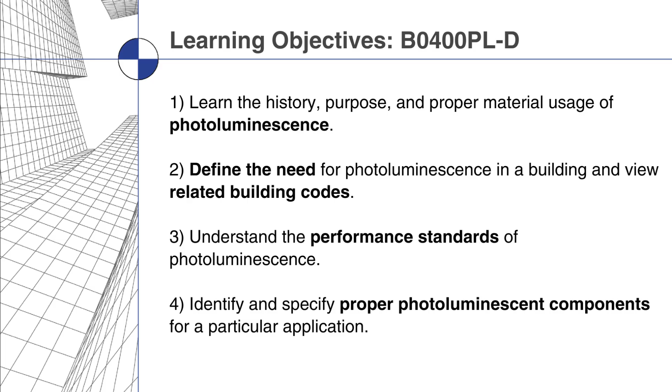By the end of this course, you'll understand the history and purpose of photoluminescence, its importance in building safety, and how it aligns with key building codes. You'll also learn performance standards and how to choose the right photoluminescent materials for specific applications.

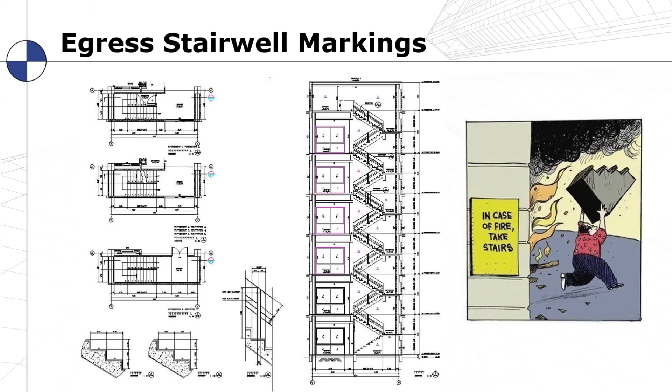Today we're going to talk about the fundamentals of photoluminescent egress markings. These are typically done in high-rise buildings. A high-rise building is anything with access 75 feet and higher with occupied space. This is a typical drawing schematic of the plan views of a stair so that you can see where the landings are and where the steps are, and then an elevation view as well so that you can see the height of the structure and the path going out.

So there's different types of luminescence. We're going to be talking about this whole glow-in-the-dark kind of process that has been introduced into the building environment to allow people to escape through egress stairwells during some kind of emergency.

There's different types of luminescence, so we'll start there. Self-luminescence, which is a radioactive item. Anything that has its own source that would be mineral-based would be some type of radioactive, and those have been introduced into building signs, but they're mostly being phased out now. They were called tritium signs. That's the exit signs that they put above the doors. That's not really part of this process.

Chemiluminescent, which is like the glow sticks you see at the fair or something like that. There's a two-part or multiple-part mixture. When you crack the little vials open inside by twisting it and shake it, they glow. Or there's bioluminescent, which is just natural plants and animals and things like that.

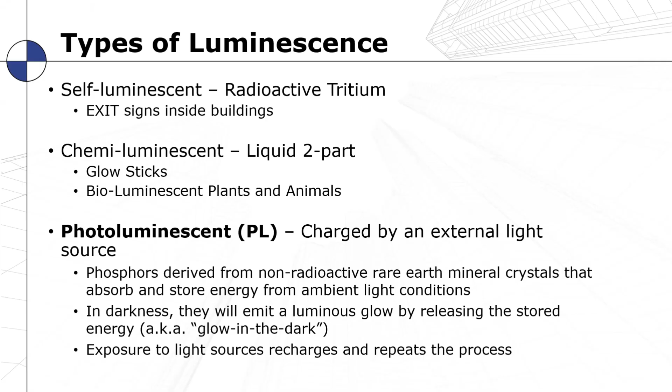But what we're talking about is photoluminescent charged particles. So it's basically pigments with a rare earth material introduced into it that is not radioactive and it's not bioluminescent. It absorbs energy through light source, and then it introduces that light back out when the charge goes away or when the lights go out, then it glows.

Different kinds of materials are used to carry this. You can introduce this kind of photoluminescent material into paint, tapes, plastics, different kinds of coatings. We'll talk about what some of those are and what the most effective ones are for use in egress stairwell markings. Charging just comes from some sort of light source.

It can be sunlight, which is very powerful. UV and all that really charges these particles. In a very short amount of time, you get a whole lot of bright for a long time. That's what I mean by saying that these are very effective.

Fluorescent light does well too. Incandescent, halogen, metal halide like gymnasiums have, where you turn the lights off and it takes a long time for it to come back up. And LED blue light, which is also quite efficient. So all of those items will charge these particles, which will allow the product to glow in the dark when you're trying to find your way out of a structure.

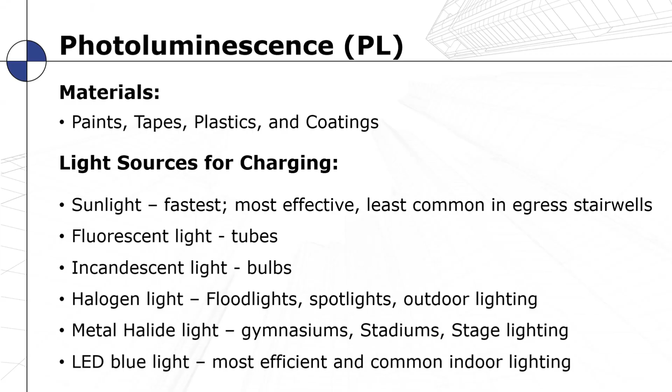So I'll give you a little bit more background. This really started out in the marine industry many years ago, where there were some offshore rig fires. It was dark, people couldn't find their way, so they started introducing photoluminescent paints, and then that moved into other parts of industries, like transportation, buses, trains, and airplanes.

Some are electrical lighted, some are this kind of glow-in-the-dark material that charges from light. So when the lights go out, you can see the pathway to make your way to the exits and things of that nature. And finally, in the last 20, 30 years, it has made its way into the construction and building industry.

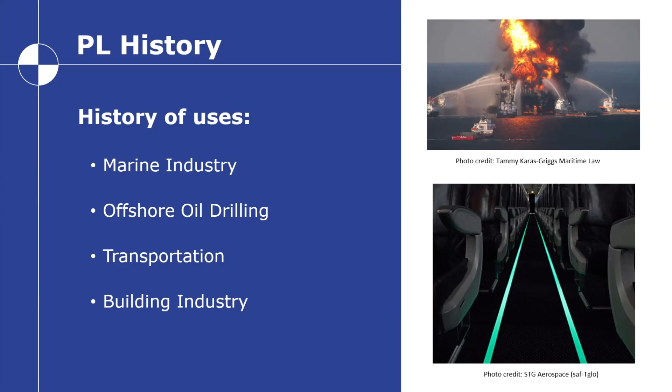As it happens, sometimes the catalyst for change in building codes comes from some kind of building tragedy or disaster that was unforeseen. People didn't realize what they were into until it was already there.

The MGM Grand fire is one that's used quite often. Something that came from that is they realized there were a lot of holes in the structure that they needed to fill in with some kind of fireproof materials.

And then later on, the One Meridian Plaza fire happened in Philly, and that showed a need for some kind of lit signage that allows firefighters and first responders to make their way through the structure and understand their location in the building in reference to where they started out or where the exit is, so they can find their way out in an emergency.

And in the World Trade Center, if you remember back long before 2001, there was a bombing in the basement of the World Trade Center, and that sparked some interest in trying to find ways to expedite getting people out of high-rise buildings.

Of course, those are extremely high-rise structures there, and so some things were put in place that actually did benefit in the September 11th tragedy that happened later on.

That '93 bombing in the World Trade Center sparked research to try to find ways to improve building structures. The New York folks got in contact with the National Research Council Canada, and they did some surveys prior to 9/11, which led to some markings in the towers that actually was beneficial.

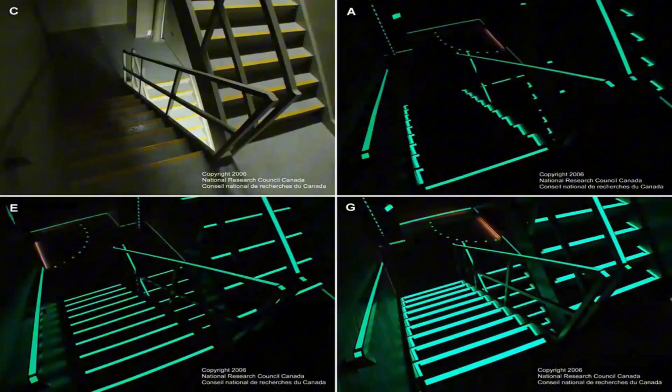What they found out is when they ran through all of these, they timed people going through this stairwell training tower to see how long it took them to get through. And what they figured out was that the two on the left, the regular lit stairwell, just like going through normal lighting...

...and the consistently lit 1 inch markings, which would be details C and E on the left side, had effectively the same amount of time for escape. So a person could escape with a properly marked stairwell in the same amount of time as one with perfect lighting.

And then the two on the right were slower. The one on the bottom right was overwhelming. It just had too many markings, and it startled people and caused pauses.

And the top right, the L-shaped markings left the center part of the steps not visible, and it slowed people down getting down there. The more people they had, it turned out to be worse, because when people blocked the L shapes on the edges, you couldn't see the center steps at all.

So they paused making their way down the stairwell. The code became the one on the bottom left, which was the 1-inch markings, and that's why the IBC and IFC and everybody else adopted it.

That was the winner. Not long after that, the building code folks did some interviews with some of the folks that survived the 9/11 incident, and they found out that these photoluminescent markings were part of what really helped people make their way out of those structures, along with people helping them out and first responders as well.

So then the process became: okay, we know what to do now. How do we do it? How do we get this throughout the industry?

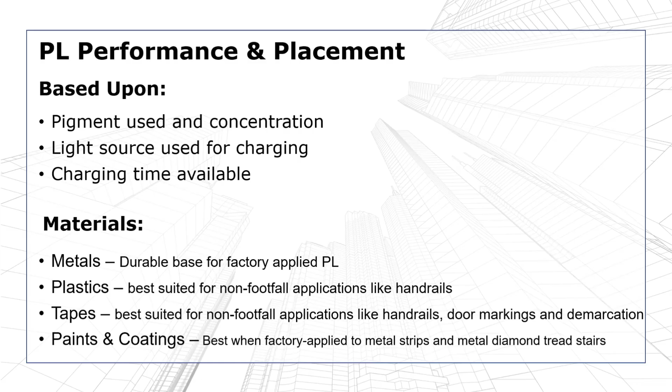Different pigments were used, and some were found to be very strong absorbers of light and good at rebounding that light back out, glowing in the dark. Then they said, okay, what do we put it on? Well, you can put it on metals, you can make it out of plastics, you can make tape out of it, and you can do paints and coatings. So there are different kinds of applications for these different delivery mechanisms.

We're going to talk about codes and how that relates to all this, mainly focusing on the International Building Code, which drives the whole picture for the fire code, and then the NFPA. We picked those two because the IBC really drives all the code work for new structures, and the NFPA is generally the rule book used for renovation to existing structures. So IBC is new stuff, NFPA is updates to existing buildings.

What kinds of buildings use this? Well, tall buildings and different kinds of assemblies—mostly high occupancy type structures, with the exception of apartment buildings. It's transient populations where people don't live in the place; they're in and out of it all the time, but frequently visited, so it needs some kind of process for people to find their way out in an unfamiliar environment.

Things like any large gathering place—religious gathering places, casinos, arenas, theaters, schools of all types, hospitals and healthcare, retail stores, office buildings—all those kinds of things meet that criteria. These are the buildings that need these kinds of markings, found in IBC 1023.9 and 1025. We're going to concentrate on those two areas.

So what is a high-rise building? According to IBC and International Fire Code Section 202, anything with occupied space above 75 feet. That can now include a roof line, so if you have an occupied roof—like a rooftop bar—and it's above 75 feet, then the requirement comes in, because a fire truck ladder can only reach 70 feet, and that's the maximum height. That's the reasoning behind why they chose 75 feet.

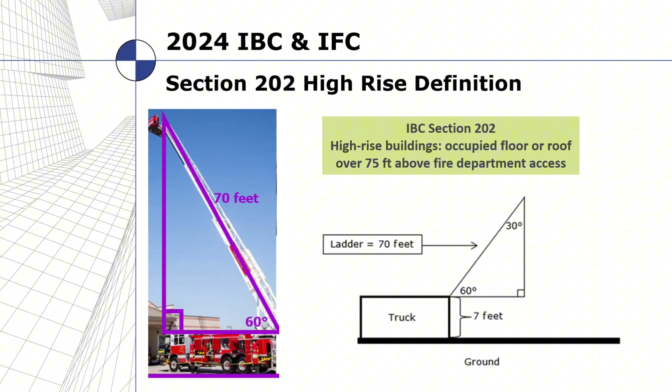Now there are two major categories here. One is a particular type of signage called floor identification signage—we'll show you some good images of that—required from 3 stories and higher. That's the one that came out of the fire, where firefighters couldn't locate or find their way throughout the structure there in the Philly building.

But the markings on the stairwells, handrails, and that sort of thing are all required for 75 feet or taller occupied space, and there are some other rules. The 1025 set tells you that you've got to mark the steps, landings, handrails, any kind of demarcation, obstacle markings, door markings, and handles—all identified very clearly in there.

But it also states that it must be uniformly marked. I talked about the way the testing was done in the research facility—they found out that the uniformity, those consistent 1-inch markings, really helped people navigate their way out of the structure. So there's a uniformity clause in the code that keeps that in place, and there's also a minimum amount of light required to charge one of these particles.

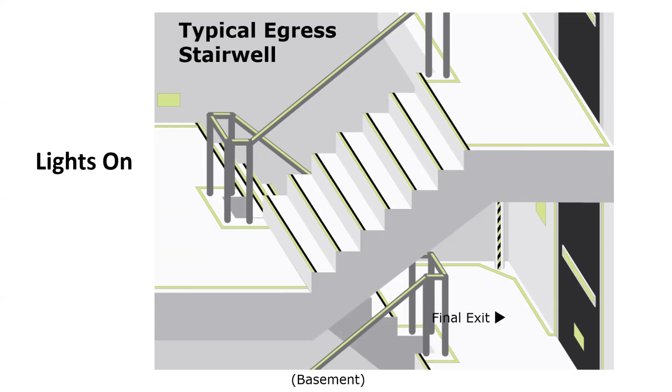And so that's also part of the standard, so you'll see some examples of it. Just generally speaking, when the lights are on, this is what you see - all those yellow looking strips that go around the landing and across the steps, down the handrails, the signage, the door markings. That's what it looks like when the lights are on. When you enter in an emergency situation with no lighting, your pathway is intuitive because you have all of these glow in the dark markings - you just follow that path all the way out throughout the structure.

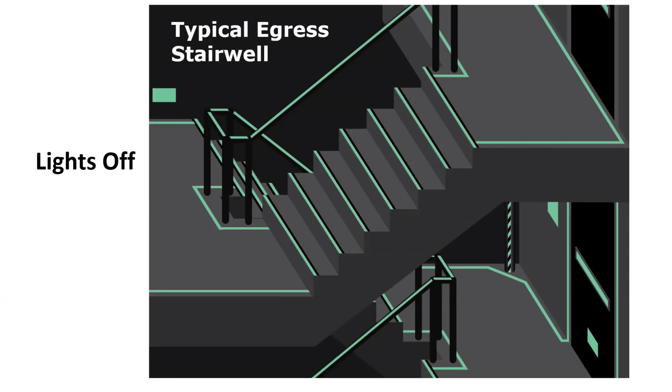So that's the ideal scenario for getting folks out and getting first responders in. It goes both directions - first responders can find their way in the dark upwards to get people out, and people can find their way out of the structure in the dark by looking at the markings on the way down.

So this is the sign that I was talking about - this is the One Meridian Plaza project. This is what brought this up to be part of the code. There needs to be an identifier that says where are you in this structure. For firefighters, they're trying to communicate with other firefighters and their communication crews to know where to go if they're trying to help folks escape out of a structure.

So there's a lot of information on this sign. One is you have to identify what stairwell or what ramp you're in - are you in the north stair or the south stair or the east, or stairwell one or whatever you call it. Is there roof access? A lot of times there's helicopters and things like that where they can take people out from the roof area, so you need to know that. What floor are you on?

And that is a raised character, so you can feel that - if there's a number 4 or 5 or whatever, you can feel that. There's also braille underneath that, so you can feel the braille number of the number sign and braille for the floor number. It tells you if you terminate at the bottom or the top - do you have to go up or down to get out of this - and how many levels do you need to go in all.

The sign has to be placed 5 feet above the floor line, and it has to be placed in an area that if the door is open to exit, it doesn't cover up the sign. You got to make sure it's away from the hinge side of the door so the hinge can't close off and block the sign if the door happens to be left open. So a lot of rules to that, and it's a big sign, 12-inch by 18-inch.

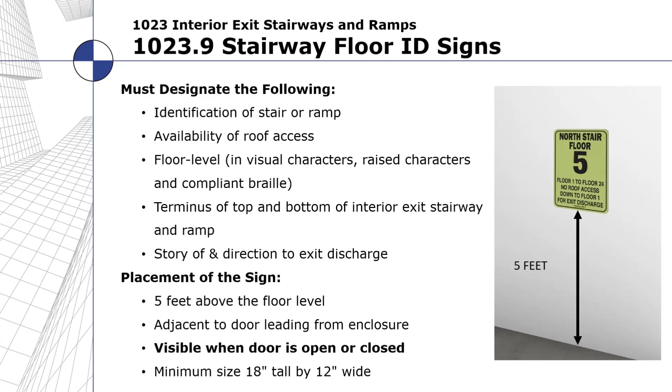But that's section 1023. The rest of what we'll talk about is going to be in section 1025 of the IBC code. There's a lot of rules about the placement of all these markings.

Generally speaking, you place anything on the step - the part where you're walking up and down - the glow portion needs to be within a half an inch of the edge of the step. They don't want it too far back or hanging over or anything like that, because that can cause you to put your foot in the wrong place. So they want it to be right there on the edge of the step.

There can't be larger than a 2-inch break. There's some allowances - you'll see a 4-inch number that happens frequently, and that's used because it's determined that up to a 4-inch gap in between the characters, people can mentally make the leap on their own. So if there's a change in direction, like on a handrail, or a height above or below a floor marking, those are all within the bounds of people being able to see that and make up that difference in their mind.

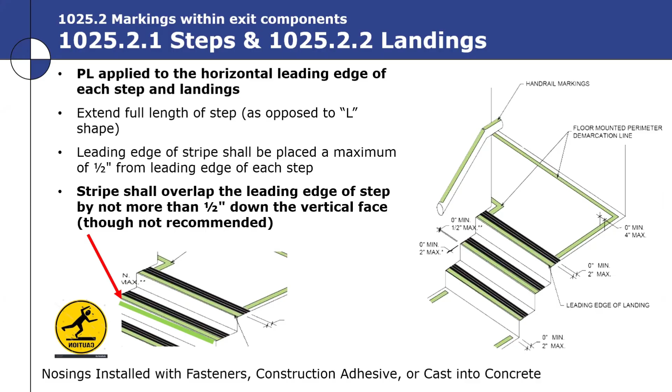So it's very important to have durable functional material in there, especially on the steps themselves where the people's footfall is going to happen, where everybody's going up and down. The edge of the stair is quite a critical element, so it's very good to have slip-resistant materials that are very durable and flexible.

They won't crack when there's a lot of load being applied to the stairs, like a lot of people going up and down the stairs with the stairs deflecting up and down. You don't want things that are going to crack and break out. So if you have epoxies, they need to be flexible.

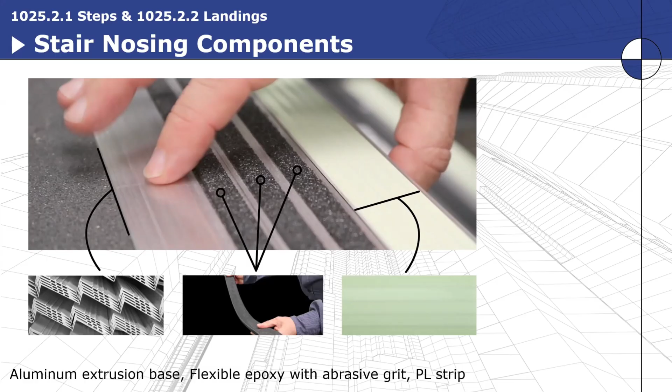And then the strip has to be the same width as the handrails and the markings and all that, which is generally 1 inch wide.

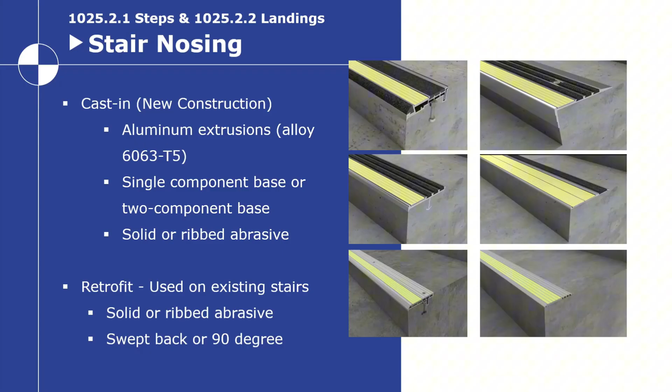The stair steps themselves are addressed in section 1025.2.1 and 2.2 for the steps and landings. There's different kinds of steps and different types of stair nosings that can be applied. They can be cast into wet concrete when the construction is poured in place, or attached to the edge of the step on the surface by screwing it down or gluing it down, or any number of different combinations. All of those are acceptable as long as they meet all the other criteria for a typical stair nosing.

One of those criteria is the ADA for the edge height. So if you're walking across the surface, you can't have more than a 1/4 inch square edge for people to step on. Otherwise, it has to have an eased or beveled type edge.

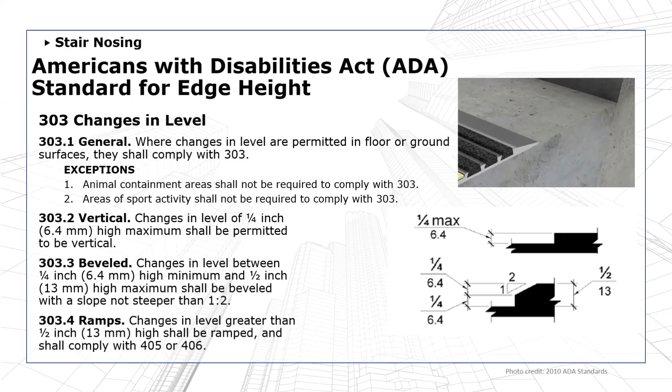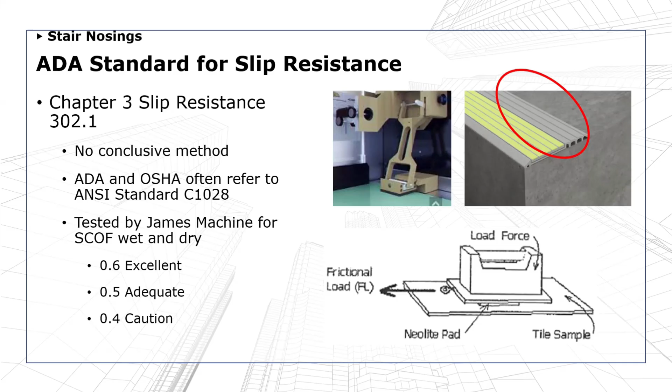It also has to meet a certain slip resistance, a static coefficient of friction, wet or dry, that is adequate or better for people walking across these stair nosings. So they have to have an abrasive quality meeting a 0.5 or 0.6 or greater number to make sure whatever you're stepping on doesn't allow your foot to slip.

So that's a pretty typical set of stairs, with different ones there that you're looking at. That's a very eased edge. You can see where the foot is falling on the stair tread. There's a glow within a half an inch of the edge of the step, and it's got a very eased edge and it's very slight, so it's comfortable to walk across when doing egress in or out of the stairs.

Handrails are section 1025.2.3. They are required to have a 1 inch wide marking on the top of the handrail, curved with the handrail. You can use tape, plastic extrusions, or metal strips that have been preformed to this kind of shape. You see that 4-inch dimension there where it changes direction, either horizontally to vertically or in a 90-degree turn.

You can have up to a 4-inch gap, so you're not having to make a bunch of miters as you're marking these stairwells, but people can easily see and follow that path. It's pretty clear and easy to follow. Very intuitive - that's the main thing. It's got to be a very intuitive path for folks.

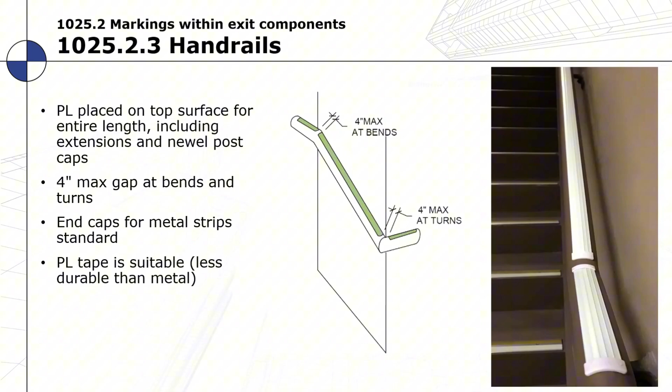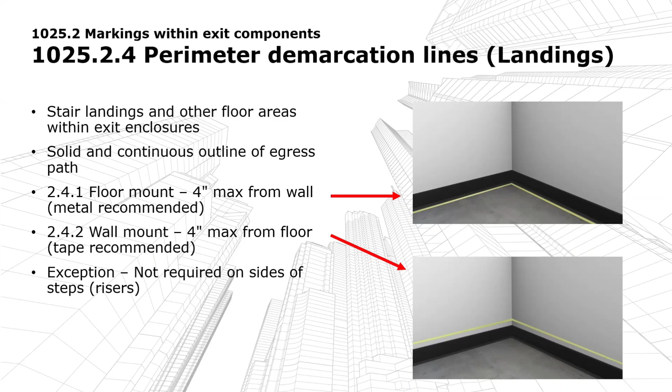When you get into the landing areas, the perimeter of the steps and things like that, you can put markings directly on the floor, or on the wall, but no more than 4 inches above the floor. This is a good example of what those kind of markings look like.

So when you're going through and changing directions on stairs to go from level to level or mid-level, you want that path to be continuous. You want to see the rails get marked, you want to see the steps get marked. You want to hit that landing and be able to visually see, oh, I've got to change direction here, and make my way on down the area there.

One important thing is that the exit door level has a particular kind of marking because they want you to obviously see how that goes. But these are mid-levels - this could be floor 2, 3, 4, 5, 25, whatever it is. In the dark, they do not want you as a pedestrian exiting to try to go into a door to feel safe, because you never know in an emergency where the harm is. The fire could be right behind that door, and you could be opening up something into a very dangerous situation.

So the way this is handled is the demarcation markings that go around the landing actually go right across the door, either in the floor in front of it or right across the base of the door. So in the dark, when you're leaving, you don't really see a door.

You just see a pathway that says you've got to keep going down, you've got to keep going down to get out of the structure.

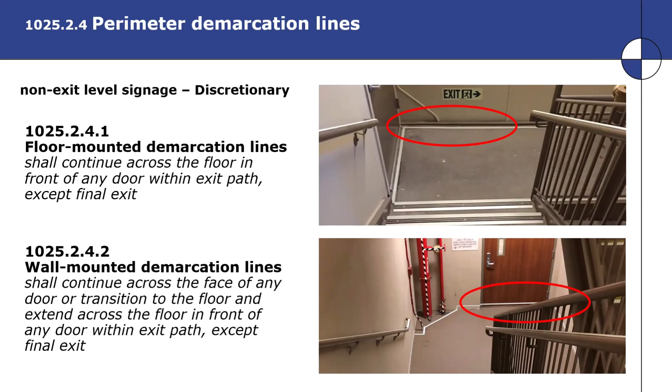Also very intentional is that any obstructions protruding more than 4 inches into the landing area are supposed to be marked with obstruction markings. These are specific striped, alternating black and photoluminescent markings that give you an automatic visual caution—as soon as you see that striping, you know that's something you want to avoid.

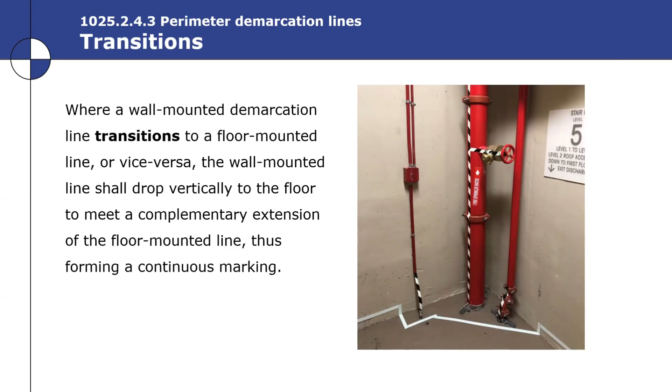They also mark the flooring and things like that to make you want to avoid that area. In the dark, you see almost nothing except those black stripes and a path that says don't go in there.

One of the things they make sure of when creating these markings is that they don't put them on top of things like handles or valves or anything that needs to be read. So the language is clear: put your obstacle markings there, but don't make whatever you're marking non-functional.

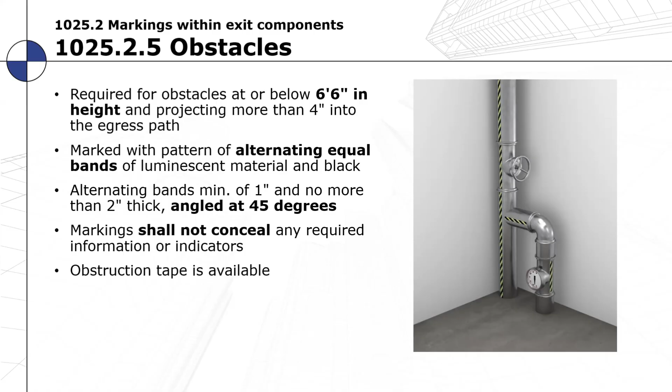These are good examples of different kinds of markings—hose cabinets, pipes, electrical, and other uses required by the fire department, water department, and sprinkler systems in these stairwells. This ensures you don't bump into that sort of thing, get injured, or break it while trying to egress the structure.

At the final exit door, you have to change the marking path compared to the other previously marked doors on the interim floors. You want to make it very clear that this is the exit. The rule is you need to mark the final exit door, or any other door required to pass through to reach the final exit door.

Sometimes there's a small corridor and you have to go through 2 sets of doors to get out of the structure. When you mark these, you run demarcation markings across the floor or wall, no more than 4 inches above the floor, then completely wrap the perimeter of the door—wrapping the jambs and the head—without marking across the bottom of the door.

This makes it very obvious in the dark that this is an opening. The door is also marked at the handles, whether it's a push bar or doorknob, and there's an exit sign at the base, no more than 18 inches above the floor.

The exit sign you see on top of the door is a standard exit sign—that's really not part of the egress stairwell marking system. That's a different set of criteria.

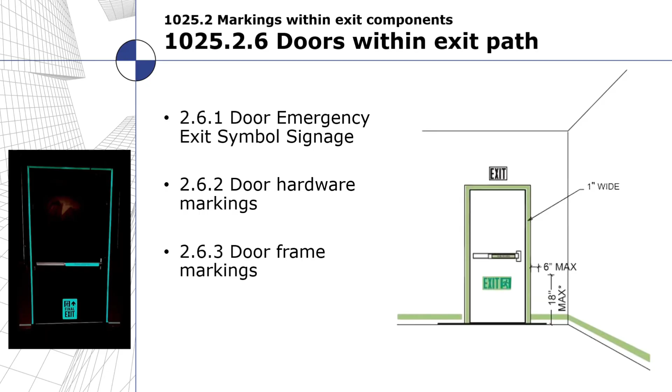The reason for the 18-inch maximum height is that in a smoke-filled area, you should be able to see this even if you're crawling on your knees trying to work your way out. You can still see that this is the path to exit through this opening.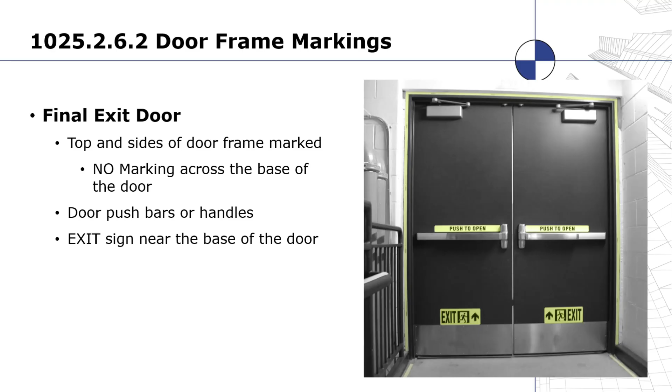There are requirements for the sizes of these markings, which we'll go over. There's a little running man symbol, which is universal, and in this case there's also an arrow, though that's not required.

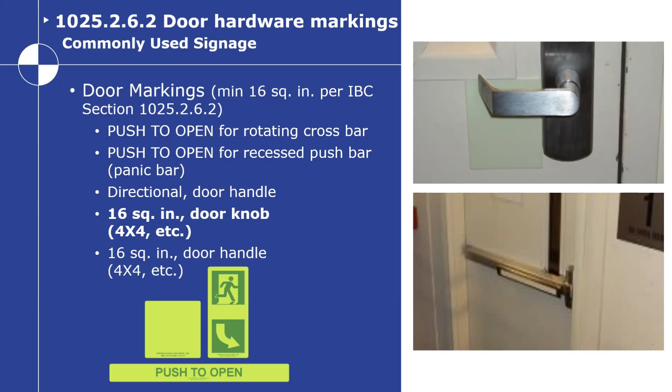The requirement for marking a door handle or push bar is that it has to total 16 square inches. That can be a 4-inch by 4-inch placard, or any shape that makes up 16 square inches. If it's a push bar, it could be 2 inches wide by 8 inches long, or whatever dimensions are needed to fit onto that mechanism that opens the door.

That's why most doors are marked this way. People ask, why not just put a sign on the door saying 'this door is not an exit'? The intention behind marking the flooring across the base of the door is that it's completely blacked out so no one even sees a door there. If you put a 'not an exit' sign on a door, it still tells people there's a door there, and even though it says not an exit, people might still try it out of desperation when panicked, making decisions without forethought.

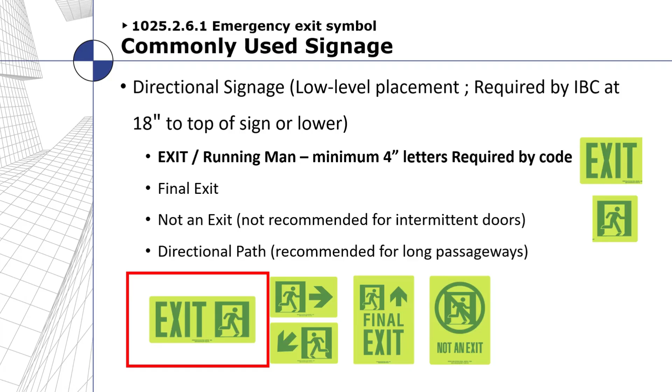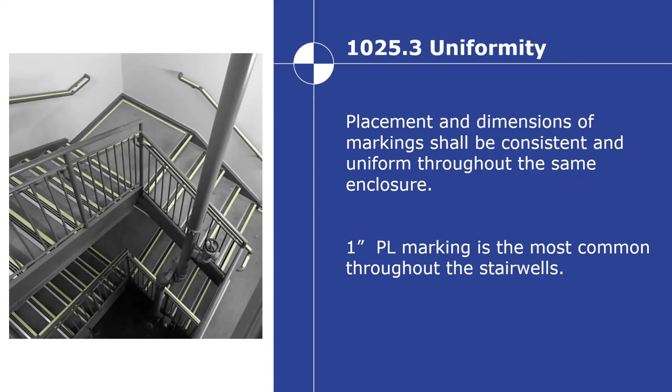So I mentioned uniformity. Section 1025.3 of the IBC has a uniformity clause stating everything should be marked the same way, with the same sizes of markings, the same edge-to-edge markings, and so on, so people aren't confused. You don't want different sizes of glow markings that could cause someone to pause and wonder why something is extra bright or extra wide, and whether they're supposed to do something. Keeping it all uniform makes it intuitive.

There are a couple of test standards referenced from the building code. Section 1025.4 of the IBC references how performance is supposed to work for these glow-in-the-dark egress marking materials: Underwriters Laboratories UL 1994, and ASTM E2072. Both have requirements on how much light charging is needed. Generally, 1-foot candle of light for an hour will charge the material enough to give a bounce-back of 30 millicandelas per square meter for 10 minutes, then 5 millicandelas up to an hour and a half.

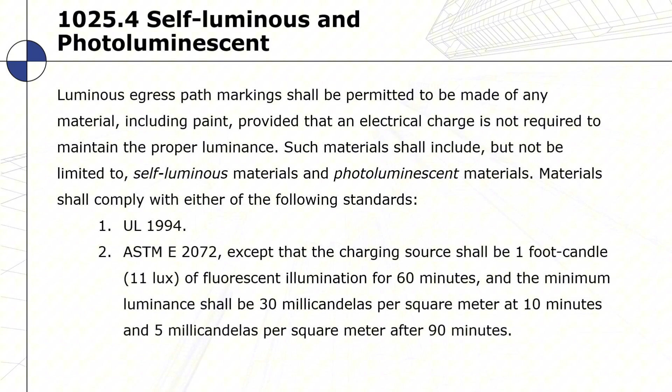So you should have visible light. With an hour's worth of charge on a minimal amount of light, you should get a substantial charge for the first 10 minutes and a very visible charge for the next hour and a half on the way out. The majority of these photoluminescent markings I've seen last many hours afterward, getting a little fainter over time but lasting several hours.

People ask about paint and tape and things like that, and these products all have their place. One thing Underwriters Laboratories has stated is that field-applied paint, as opposed to factory-applied paint, is different. Factory-applied paint is applied to a material brought to the site and then attached, like tape, extrusions, or paint on metal.

Applying paint directly in the field is not recommended by Underwriters Laboratories because you can't get the consistency. If there's inconsistency in the pigmentation, it looks like splotches, and when you have splotches on a step in the dark when the lights go out, it looks like holes or broken spots. This causes people to pause, which is exactly what they don't want—they want people to keep moving through.

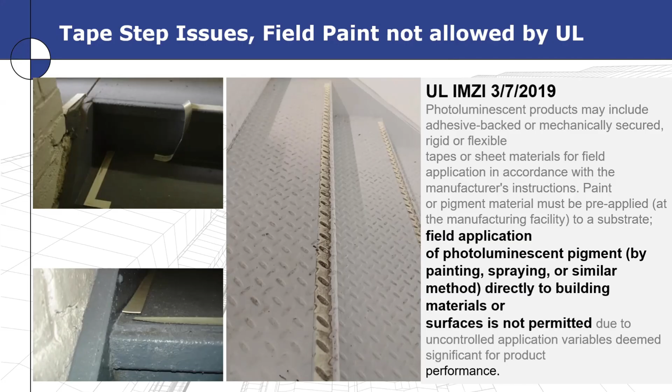One application where field-applied paint works pretty well, because hardly anything else works, is on a metal diamond tread stair, like you see in that middle picture. It's pretty hard to put anything else on there that holds up, so field-applied paint is probably the best alternative in those situations.

Exit enclosures where photoluminescent markings are installed shall be provided not less than 1-foot candle of light, which is the standard I mentioned earlier. What this means is that any building that's going to be occupied has to have the lights on an hour before any occupants come into the building.

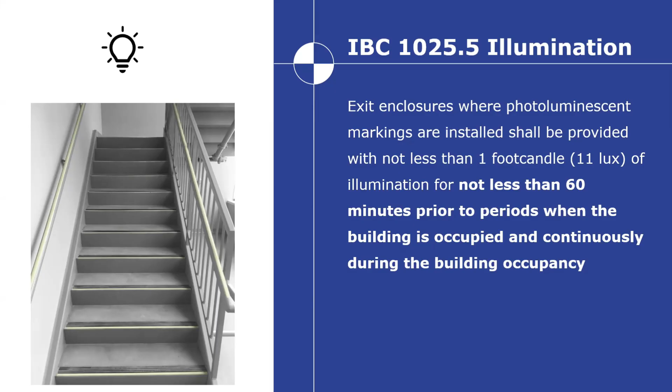So if you have a 24-hour building, you have 24-hour lighting. If you have a building that opens up at 8 o'clock in the morning, the lights need to come on in that stairwell at 7 o'clock in the morning. It requires that because it allows these pigments to be charged fully by the time the building is occupied. And once the building is occupied, if the lights go out in an emergency, they're fully charged. If they don't have an hour to get prepped ahead of time, there's a period where they wouldn't be completely effective. So that's the rule: you've got to have the lights on an hour before occupancy.

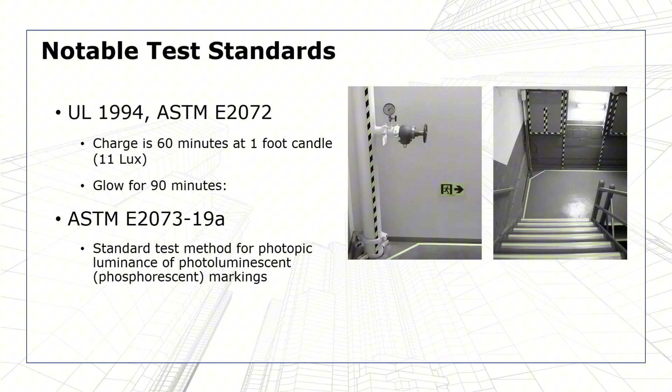The test standards, ASTM E2072 and E2073, are used along with UL 1994 to state these same kinds of things, that the timing is critical for charging and all that, so that you get the result you need when the lights go out. It's a very good example of what happens with the lights on and the lights back off again, so that's what you want to see.

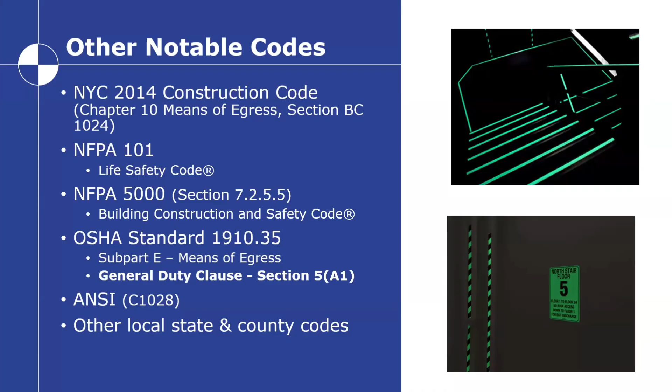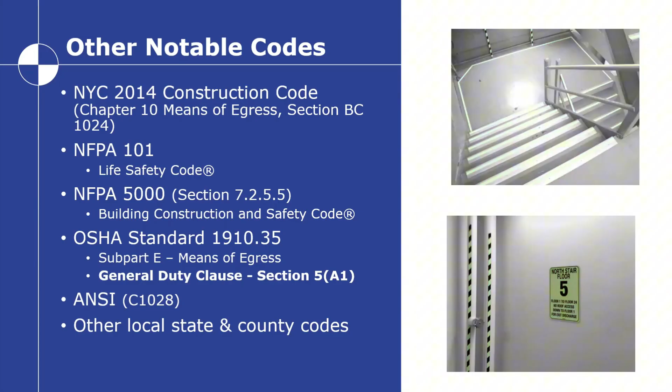A lot of other notable codes are cities and municipalities, and there's the NFPA, which usually governs existing buildings being renovated. OSHA has standards too. They have a general duty clause that says if a building isn't one of those in the long list of high-occupancy type buildings I stated earlier, but someone is paid to go to work in that building, they should have the same protections under the code as any other building. So say you've got residential apartments or condos that aren't part of the standard list—if you have someone who works the front desk or does maintenance, and that person is required to be in the building and paid to be there, they're required to have the same protections. So you'd have to have the same kinds of markings in that structure because you have a worker or some type of transient population in there, not just a transient or permanent resident population.

So here's a few good examples of different structures. Here's a high-rise building with markings in it. This is Time Warner Center in Manhattan, New York City—properly marked.

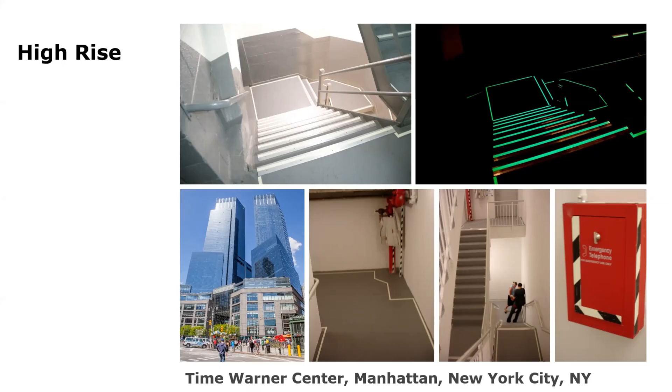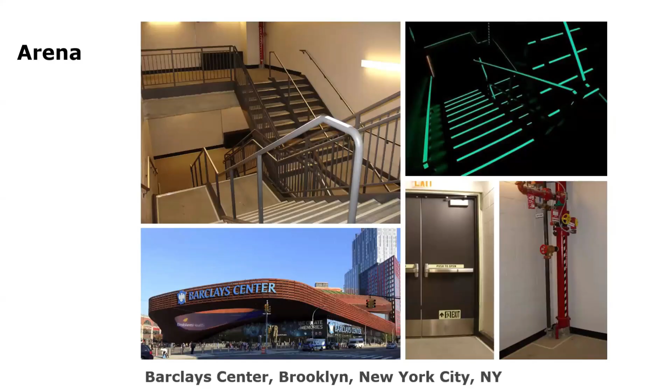Outdoors, you think, well, why would you need them outdoors? Well, certain areas like this particular one, San Antonio River Walk, there's a lot of walking across that river back and forth on little bridges. There's a lot of lighting out there, but if the lights go out and it's totally dark, you don't want people falling in the river. This allows people to make their way across all those openings, stairwells, and bridges.

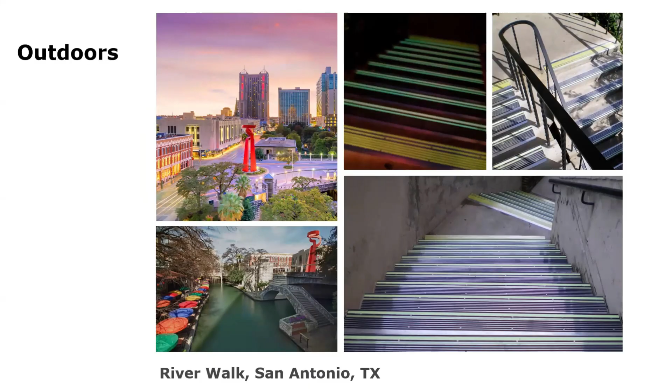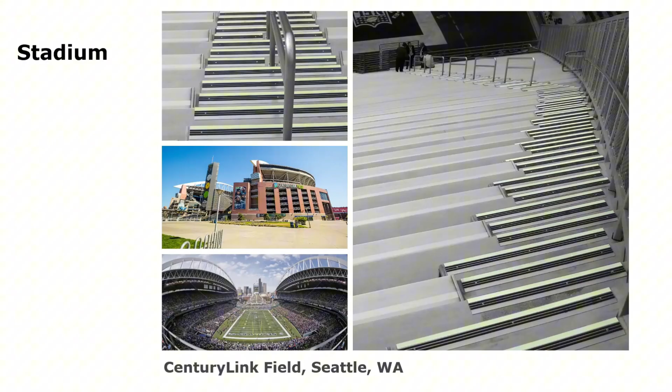There's a CenturyLink field in Seattle, Washington. This area is called the Crow's Nest. They had people slipping and falling, so they decided to put some stair nosings in there. During the discussion, they said, sometimes the lights go out, like in the Super Bowl that happened years later after this was put in. The lights went out and it was completely dark. If they had had these kind of stairwell markings, that whole place would have been lit up at every stair, and you could have found your way out of that structure completely in the dark. This provided all of that kind of protection.